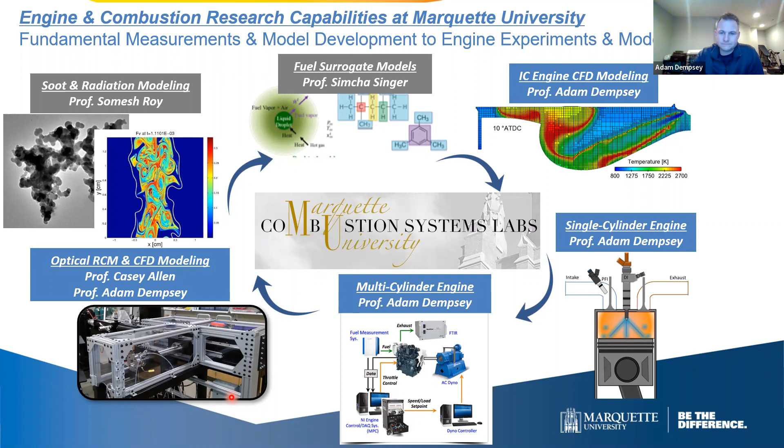So diving into the topic at hand, like any good engineer, we have to define the problem first. So why am I talking to you today? What problem am I trying to solve? The transportation industry in the United States consumes about 28 quadrillion BTUs of energy each year.

This includes all energy used in transportation. Fossil fuels like gasoline and diesel fuel are the dominant ones, obviously, but also some natural gas and propane. This includes all biofuels, mainly ethanol, and then also any electricity, so any electric vehicles. That's the total energy use.

But it's difficult to digest what a quadrillion BTU is. So that 28 quadrillion BTUs is equivalent to about 224 billion gallons of gasoline. It's not to say that it's all gasoline, but that's the energy equivalent. This is about a third of the country's total energy consumption, if you include buildings, factories, homes, and everything we consume on an annual basis. Of this energy consumption today, about 90% of it comes from fossil fuels, namely gasoline and diesel.

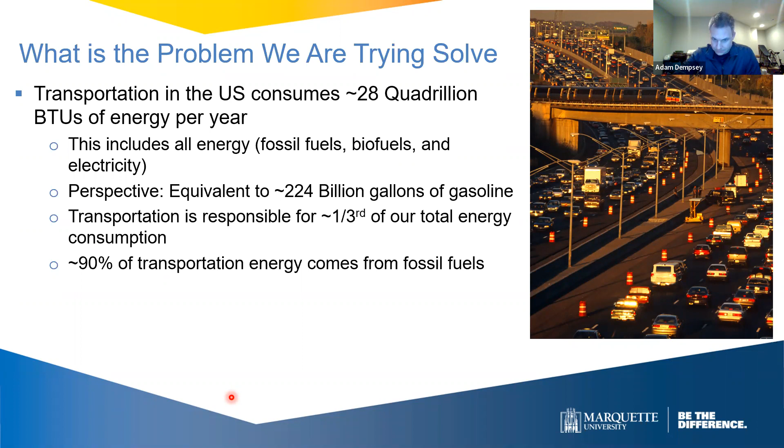So that leads to the problem statement. The problem is that passenger and commercial vehicles consume a very large amount of a primarily non-renewable resource, fossil fuels, and they emit toxic and greenhouse gas emissions. This is not sustainable because the resource is not renewable, and it's also a problem because the emissions negatively impact our environment. So that's the problem we're trying to solve.

The negative impacts on the environment are twofold. There's the toxic criteria pollutants that tend to affect local air quality, things like nitrogen oxides, sometimes referred to as NOx, and unburned hydrocarbons or unburned fuel. These are a problem because in areas where they become concentrated, like urban settings with a lot of vehicles polluting with these emissions, in the presence of sunlight, they form photochemical smog. This picture is of Los Angeles, and in the basin they have a lot of challenges with photochemical smog, particularly back in the 70s and 80s when vehicles weren't as regulated. Engines also produce carbon monoxide, soot, and particulate matter, which are also very damaging to human health.

Other emissions that we care about, more recently, weren't really on our radar say 30 or 40 years ago, are greenhouse gas emissions and how they affect global climate change. When we burn fuels, we release CO2. If you're working with natural gas, you might release some methane. And while it's not really a challenge for combustion engines, some industry applications will emit nitrous oxide.

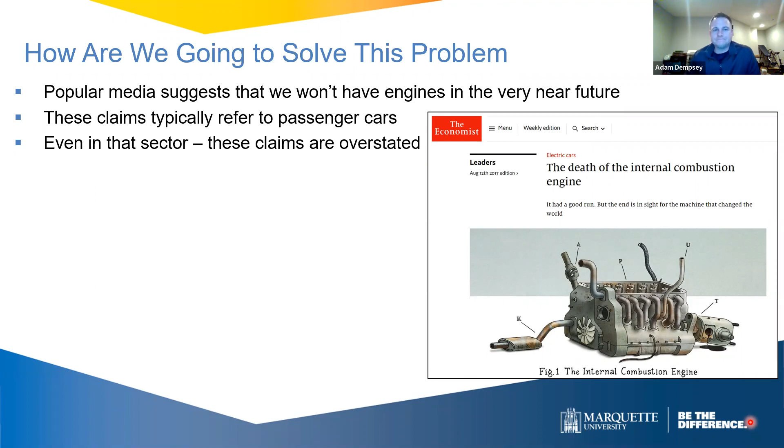So I do believe that battery electric vehicles will be a very important technology for the future of sustainable, clean transportation. I think they're a great thing. I think we need to be a little more honest about what sectors of transportation are well suited for battery electric vehicles. So I want to be very clear, I am not anti-electrification, I'm pro-arithmetic. I don't bash technologies, we just do the math and then we decide if it's a good technology.

So let's do a little bit of analysis in this presentation to walk through what sectors might be good for electrification and what sectors might we still need engines.

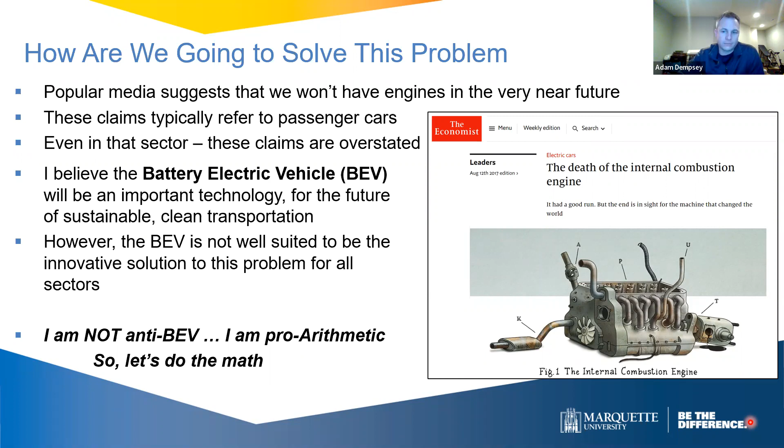So why would anybody consider to keep developing the internal combustion engine? Well, we're talking about transportation. So from a systems engineering viewpoint, this is a mobile application and we have to carry our energy source on board the vehicle. So energy density is of the highest priority.

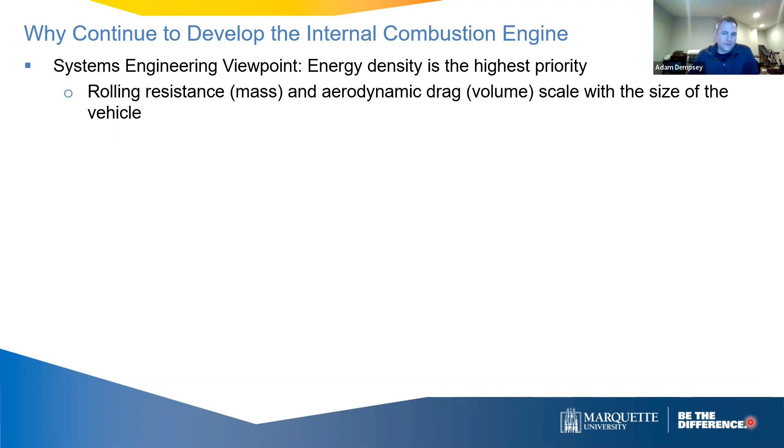And the rolling resistance of a vehicle scales with its mass because of friction, and the aerodynamic drag of the vehicle scales with its volume because of the frontal area. So if I'm carrying around an energy source that propels my vehicle, I want to be energy dense on both of these fronts - on a mass basis and a volume basis.

So here are a bunch of energy carriers, and it's a scatter plot of the mass-based energy density versus the volume-based energy density. So I want to be in the upper right-hand corner, which is energy dense on both fronts, and that's where we find fossil fuels.

So that's gasoline and diesel, which are very dense in terms of how much energy they carry per unit volume and per unit mass. A lot of times people talk about hydrogen fuel cells as a propulsion mechanism for vehicles, and hydrogen has a lot of challenges from a production standpoint, but it also has a lot of challenges from a storage standpoint. So hydrogen gas at standard pressure and temperature has essentially no volume-based energy density.

And if you compress it to 700 bar, which is very high pressure and requires a lot of energy, you can start to get some volume-based energy density, but it's not very good. And if you liquefy it, which is very hard to do, obviously cryogenically, and then store it as a liquid, which is very challenging, you still have very low volume-based energy density.

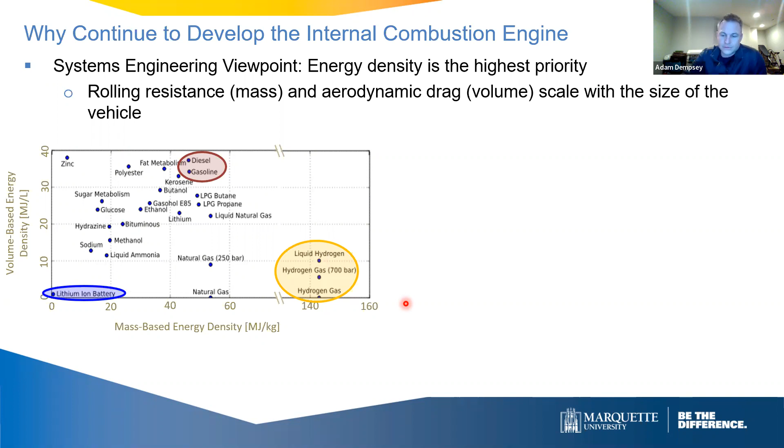So just to give you some context here, if you take the extremes like an Airbus A320, it carries 266 megawatt hours of fuel energy when it's fully loaded with fuel. If you used a state-of-the-art lithium-ion battery to replace that fuel tank and have a 266 megawatt hour battery, the battery itself would be 19 times the max takeoff weight of the airplane, and it would take 11 days to charge the battery. So a full battery electric airplane is kind of a non-starter with current technology.

Bringing it back down to earth in an application that I'm very interested in, if you just look at heavy duty trucks - a class 8 semi truck that has a gross vehicle weight of 80,000 pounds - if you wanted to have a 500-mile range battery electric version of that truck, you would need a 1,000 kilowatt hour battery pack. That battery pack would weigh about 15,000 pounds, and that's lost payload for the operator of the truck. So that's a bad thing.

The battery itself would cost about $180,000, which at current battery prices, which are coming down admittedly, is really expensive - that's about the same price that the diesel truck costs today. And that's just for the battery. Even with a state-of-the-art charger, you would have to charge this thing overnight for about 12 hours.

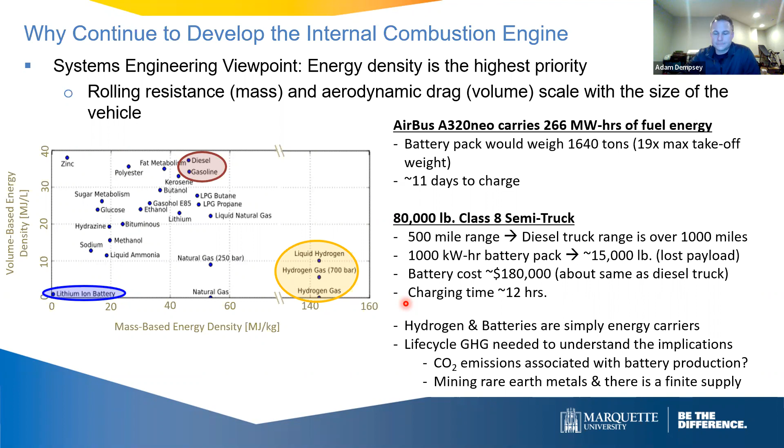I think I've made it pretty clear that liquid hydrocarbon fuels have unrivaled energy density, which is repeated in this plot here - the energy density of hydrocarbon fuels versus a lithium-ion battery. But conversion also matters. If you look at the power density in kilowatts per kilogram of an internal combustion engine versus an electric motor, the electric motor is more power dense. So you have to take a deeper look, and for different applications with different power requirements and time of operation requirements, that will likely determine the optimal system. It's not really a slam dunk that the battery electric vehicle could be used to replace all internal combustion engines.

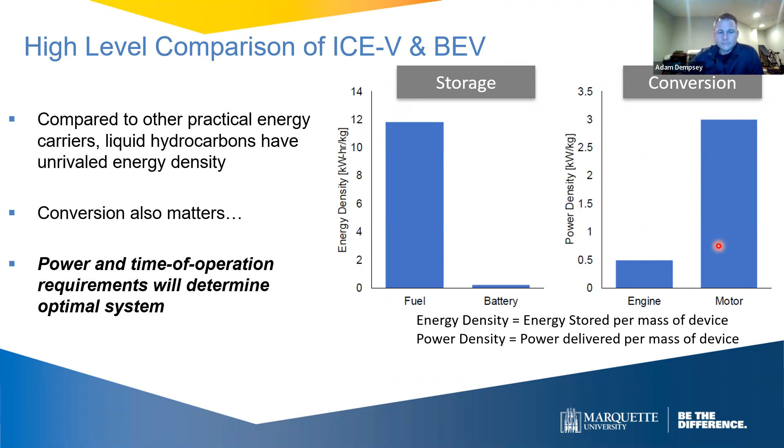So why don't we combine this picture and look at a couple of different applications?

Before we do that, I want to remind you that there's another important aspect here, and that's recharging time or filling time. In some applications filling time is maybe not important, but in others it's really important. For liquid fuels, filling up your car doesn't take very long, and the reason is that the energy flow in a fuel nozzle is just astronomical. Most commercial gasoline nozzles for passenger cars run at about 5 gallons per minute, meaning there's 10 megawatts of power flowing through your hand. If you're filling up a heavy duty diesel truck at a truck stop, they tend to have higher fuel rates at about 30 gallons per minute, which is about 60 megawatts.

Compare that to charging an electric vehicle. With a level 1 charger, the power coming out of your wall in a residential home with 20 amp service, you're only flowing about 2 kilowatts. You can upgrade to a 240 volt 80 amp service, known as a level 2 charger - these are available today when you purchase an electric vehicle, but that's still only 19 kilowatts. Even a Tesla supercharger, a level 3 charger at 480 volts and 300 amps, is only 144 kilowatts.

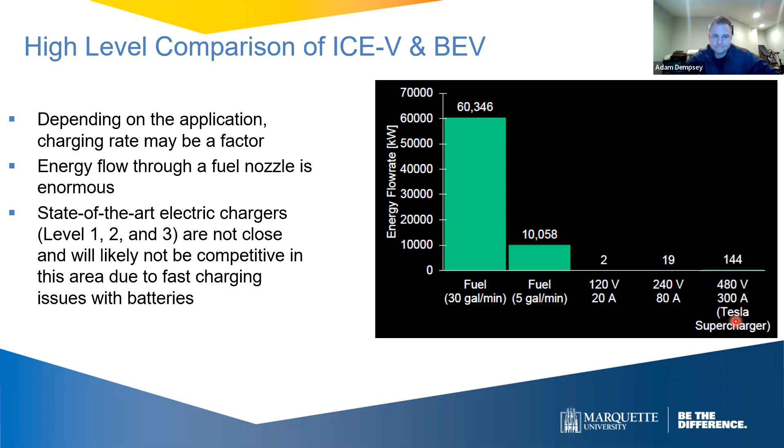So why don't we do some very simple analysis where we evaluate for different applications the trade-off between charging time, weight, and all these different factors, and see if an internal combustion engine or a battery electric vehicle is probably a better solution. This analysis was done by a colleague of mine at the University of Wisconsin, Sage Kokjohn. We've co-authored a few papers together comparing alternative fuel IC engines to battery electric vehicles, and he was kind enough to share these couple of slides with me. I think it's very enlightening.

So if we look at Sage's analysis, this is a plot that we're going to look at. I want to explain it before we look at it: it's power of the propulsion system versus operating time. And what's being plotted on the contours is the mass of the electric vehicle minus the mass of the internal combustion engine system.

So if you want to operate for longer periods of time at higher power levels of the BEV, you're going to need a bigger battery, and it's going to weigh more compared to the engine. So that's why this contour plot looks like this.

We're going to look at various applications, and here are some of the assumptions for the battery electric vehicle and the internal combustion engine. We're going to size the application for peak power, because you're going to have to hit certain power levels, even though on average you're going to have much less power. The internal combustion engine will assume an efficiency of 35%, which is pretty reasonable. The BEV will have a charging efficiency of 85%, also pretty reasonable. And we'll take a state-of-the-art energy density for a battery, which is about 250 watt-hours per kilogram.

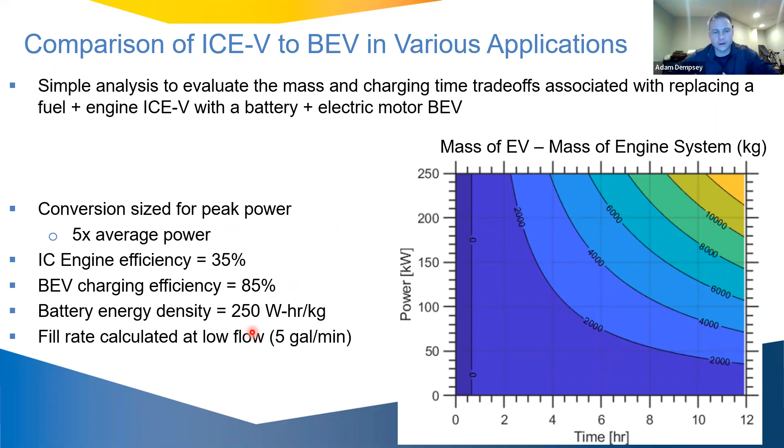So the first application I want to look at is what I would call just a light-duty passenger car. This wouldn't be like the sports car Tesla. This would be a battery electric vehicle bought for commuting. It's not really a high power application. It has a peak power of only 100 kilowatts and an average power of about 20 kilowatts, with a 3-hour operating time.

So this would have a range of maybe a couple hundred miles, but certainly not a range of 400 or 500 miles like some of the really expensive, high power output Teslas and other vehicles being advertised. So if we said we needed a battery that would give us 3 hours of operation and 100 kilowatts of peak power, then the battery and the motor together would weigh this much, and the fuel and the engine would weigh this much, a difference of several hundred kilograms.

The other factor here is, how can I refill my vehicle? If it's the IC engine version, you can fill it in almost no time. If it's the battery electric vehicle, it's going to be really challenging to charge this overnight with your standard outlet in your garage today. But you could easily upgrade to a level 2 charger, and you'll be able to charge this vehicle overnight, no problem. You could drive this vehicle to work every single day on a full charge.

And even if you wanted to drive from Milwaukee to Platteville and drive around for the day, and you couldn't quite make it back, if you could find a Tesla supercharger somewhere in the area, you could charge while you're having a meal. It would only take a half hour and you could drive home.

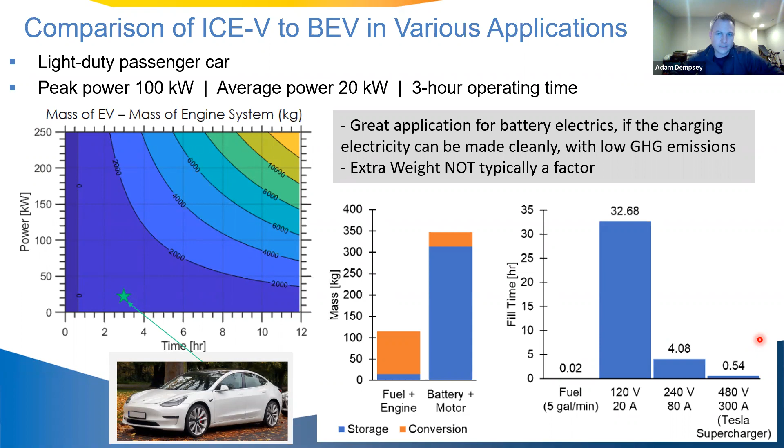The challenge comes in as we start to get to bigger and bigger vehicles. So if we look at a medium duty application, this is more of a commercial vehicle application - this could be a pickup truck towing a trailer, or a large cargo van full of tools, but it's a vehicle that the operator is using for his way of life, and he's got some payload. So it's a bigger vehicle, it has higher power.

We need to size the battery to run all day long, because if you're towing trailers back and forth to the work site, or maybe it's a small dump truck hauling aggregate, it might run all day long. So we're going to size the battery for 8 hours, and it's going to be a big enough battery to deliver these types of power levels.

And that means compared to a gasoline or a diesel engine, it's going to weigh about 2,000 kilograms more, which is roughly 5,000 pounds or something. So it's a significant amount of weight that we're going to have to carry around, and that might negatively affect your cargo or your payload.

The other challenge with this is charging, right? So if you charge this medium duty vehicle at your garage or your shop or your place of business overnight, even a level 2 charger is not going to charge it overnight. So if you need this vehicle every day and you used it for 8 hours one day, you won't be able to use it the next day with a level 2 charger.

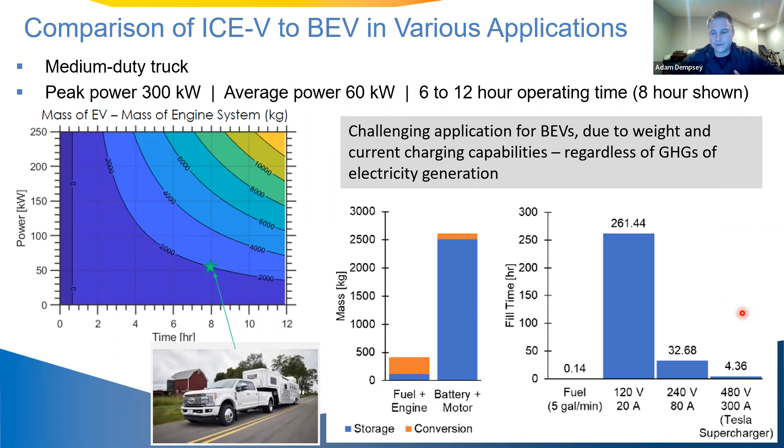So you're giving up a lot of payload, which is not good for commercial transportation. That's what you're hauling is payload.

So in my personal opinion, this is a very challenging and not likely application for battery electrics. And if we want to solve our problem, we're going to have to go a different way.

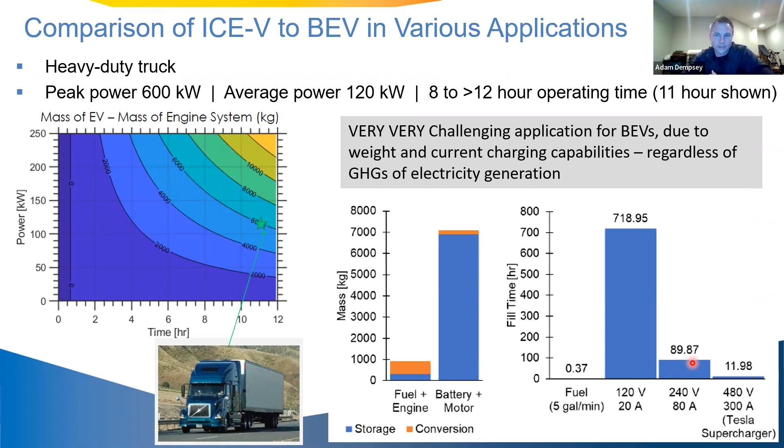So if you look at some projections, you can see some of these themes. This is projections out to 2040 for transportation energy demand. So you see gasoline, diesel fuel, jet fuel for aviation, natural gas, and electricity. Electricity is starting to grow because BEVs are certainly going to penetrate the light duty market. And that's why gasoline demand is going down around the world.

Diesel fuel demand, however, is projected to grow by about 40% in the next 20 years. This is due to the developing world and the growing global economy and e-commerce and things like this. The economy is driven by heavy duty trucks, large ocean going vessels, rail, all those things. So as the economy grows, diesel fuel demand grows.

It's very difficult, as I just said, to fully electrify these sectors. So these sectors are growing due to the growing world and the growing economy, and they're sectors that we can't really electrify. So the problem is getting worse and worse because we're burning more and more diesel fuel in the coming decades.

So there's an imminent need to decarbonize heavy-duty diesel engines, and we need to do it with renewable, low life cycle greenhouse gas fuels, because battery electrics are not a good technology for this sector.

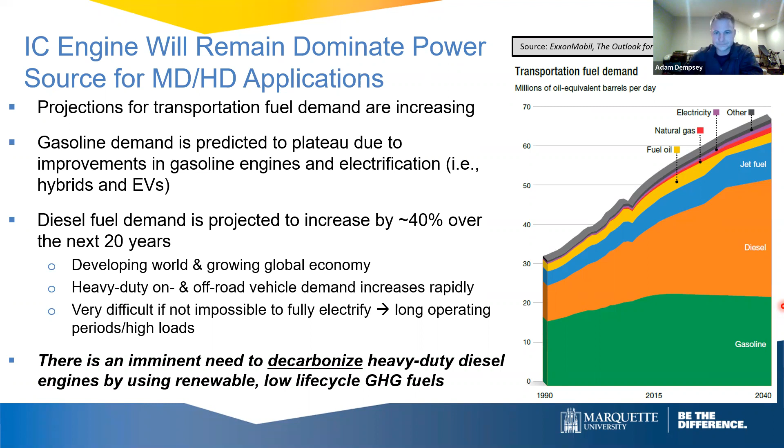So when I say low carbon alternative fuels, what am I talking about? Well, there's a handful of candidates. There's more than what I'm going to list here, but these are the ones that I'm interested in. So the alcohols, say methanol and ethanol, maybe even butanol and propanol, they can be made from a variety of biomass feedstocks, among other things, and they will have roughly 30 to 60% lower life cycle carbon because they were made from a feedstock that absorbed CO2 when it was growing, hence the term biofuel.

Natural gas and propane are fossil fuels, but they have lower indigenous carbon compared to gasoline and diesel. So using them as fuels in the near term is a good way to curb our CO2 emissions because they will emit less CO2 per unit energy.

And then hydrogen and ammonia are interesting fuels because they're carbon free. They have some challenges with energy density, like I talked about before. But if you can make them from renewable energy, then they're truly carbon free. These are very interesting energy carriers for engines as well.

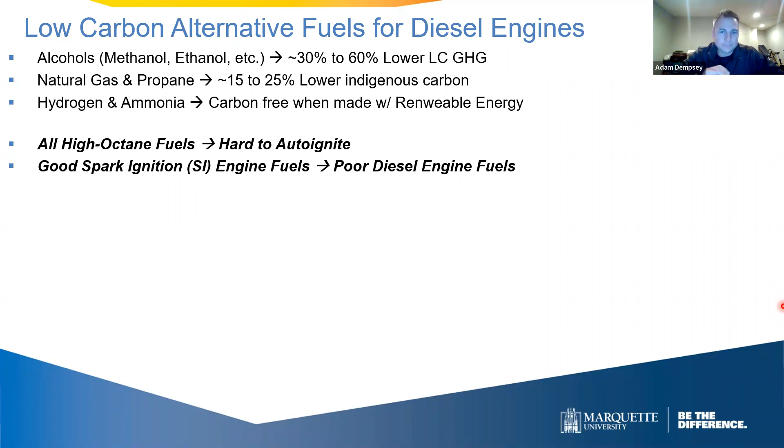The problem is all of these fuels are very difficult to auto-ignite. So they make very good spark ignition engine fuels, but they make poor diesel fuels. And I'm proposing that we replace diesel fuel with these fuels.

So I think the obvious answer is, why don't we just use spark ignition engines in the heavy duty sector? Why don't we just use an SI engine in a semi truck? Well, there's a reason you don't see that today.

It's because SI engines can't meet the performance demands of a heavy duty application. If you look at the torque curve of an engine, SI engines have challenges with premature auto ignition at high torque levels. At high power levels, they have to do fuel enrichment to protect the components from high temperatures, and they also have really poor efficiency at part load. So the SI engine is really just not well suited for the heavy duty sector. They just can't deliver the performance in terms of efficiency and peak torque output that a diesel engine can.

So the challenge is, I want to burn fuels in a diesel engine, but they're really poor diesel fuels.

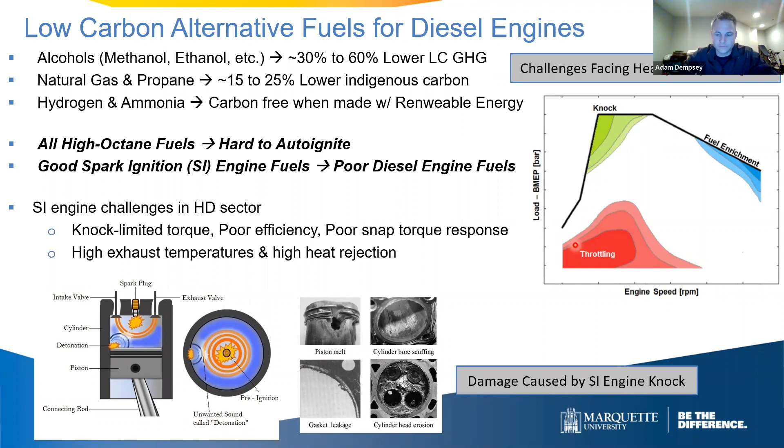Before we press on, I think it's really important that we know what the diesel combustion process looks like, so you know what we're trying to reproduce. This is a CFD simulation of a diesel engine showing what the diesel combustion process looks like. You can see in the animation it's a double injection strategy where we have these two injections shown in blue, and then the chemical energy release, or the burn rate of the diesel fuel, is shown here in red.

Because diesel fuel ignites pretty quickly, we can establish what's known as a non-premixed, mixing controlled combustion process, where the fuel and air can only react and release energy when they find each other. So the burn rate is limited by mixing, hence the term mixing controlled combustion. This combustion process allows us to run really high torque output because we don't have any premixed fuel, so we don't fear premature auto ignition. It also has a lot of other characteristics that are desirable for heavy duty engines.

So this is the combustion process that we want to reproduce, but with alternative fuels that really don't want to auto ignite.

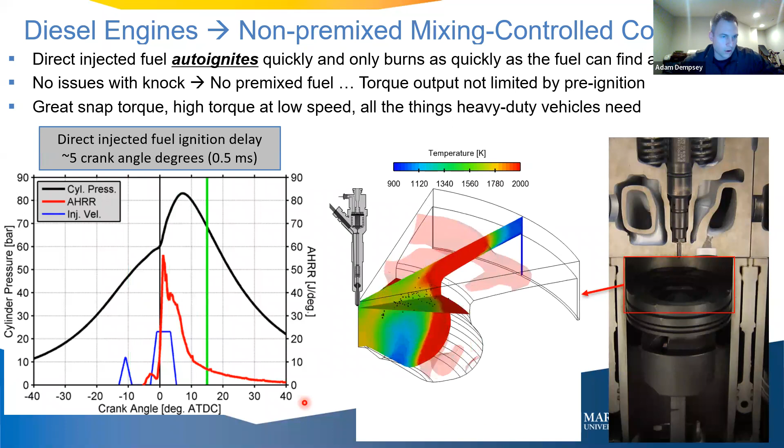So let's quantify how big this problem is. How hard are these fuels to auto ignite? This is a plot of ignition delay versus temperature - so it's the inverse of temperature. Low temperatures are shown over here, and higher temperatures over here. The ignition delay is on a log scale, so it's important that we're traversing very different amounts of time here. Then we have a bunch of fuels shown on this plot.

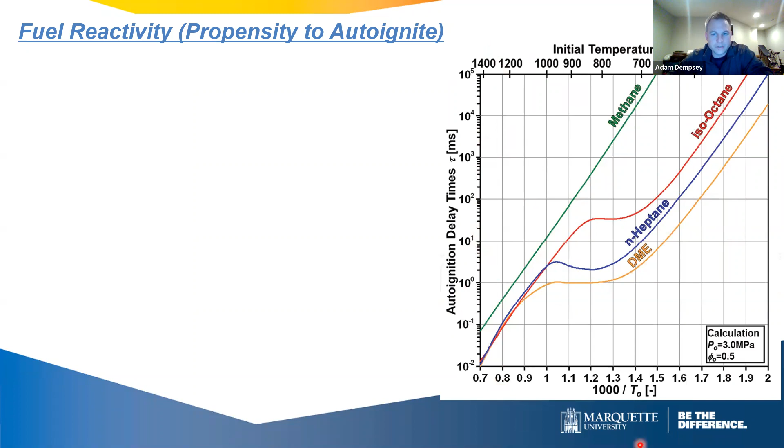So if we look, diesel fuels are low octane, meaning they have a short ignition delay - they auto ignite very readily. These are things like diesel fuel, which isn't shown on the figure, but N-heptane and dimethyl ether have the reactivity, if you will, like diesel fuel. In the temperature range of interest for engines, between about 700 and 1200 Kelvin, we see ignition delays that are relatively short, on the order of a millisecond or less, and that's what allows you to establish that mixing controlled combustion process pretty quickly.

Things that are poor diesel fuels - here I'm using methane as an example, but the alcohols, propane, hydrogen - they all have relatively long ignition delays, kind of like methane. In this temperature range of interest, we're up in the 10 to 100 to 1000 millisecond auto ignition delay time for methane. So those are very high octane, very hard to ignite fuels.

Well, you might be thinking, 10 milliseconds isn't a very long time, so why do we care if the ignition delay is 10 milliseconds longer for methane than N-heptane or something? Well, in an engine, 10 milliseconds is forever - it's an eternity. The piston goes from top dead center to bottom dead center in 180 crank angles, so 10 milliseconds is 120 crank angles - almost the entire expansion stroke.

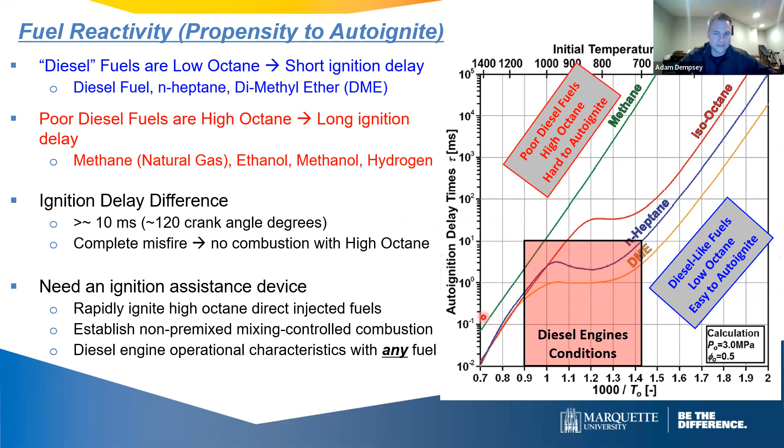So let me illustrate that a little more clearly with the simplest way I can think to do ignition assistance. You can see that ignition delay time is very sensitive to temperature. So all we got to do is get it hotter. If we can get the methane hot enough, it will have an ignition delay very similar to a diesel fuel.

Where you're going to get this heat from is unknown. You could run a heater or something like this, but this is obviously going to hurt the engine efficiency. It's also very difficult to control intake temperature very rapidly. So intake temperature control is kind of a difficult thing, but this illustrates that if we could heat the engine enough, we could run it on something like ethanol.

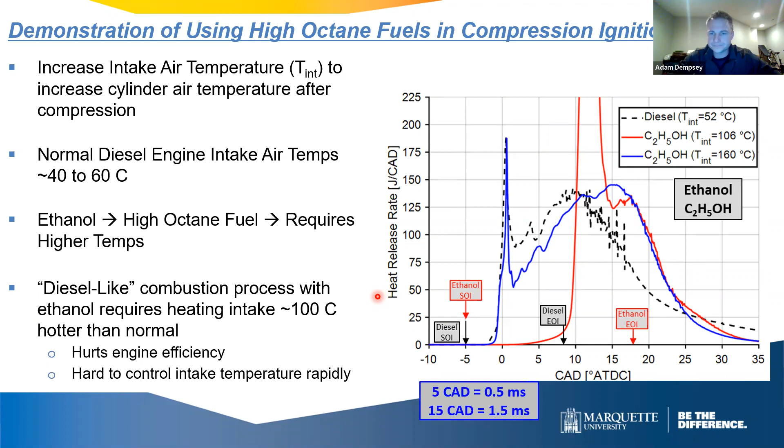What we're working on is something we think is obviously a little more innovative, but is something we can control on a cycle-by-cycle basis. So what we're trying to do is develop an actively fueled pre-chamber, which will serve as an ignition device.

A diesel engine would typically just have this center direct injector delivering these blue plumes, which would be the diesel fuel. But then we have this pre-chamber igniter where we can have a separate fuel injector filling that pre-chamber. We can fire a spark plug, and then hot jet flames will emanate from the pre-chamber. And when we direct inject a fuel that doesn't want to ignite, if it comes in contact with an already burning flame, it will auto ignite. So the pre-chamber jets serve as our ignition source.

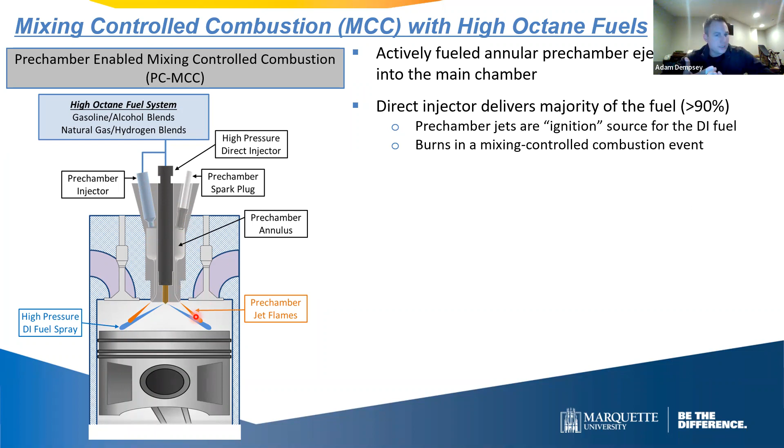We've been able to show with simulations that this will allow us to run all sorts of different high octane fuels that don't want to auto ignite, such as gasoline, ethanol, natural gas, hydrogen. You could even run blends of those fuels, because if you have an ignition assistance device that is robust like a flame, octane number doesn't really matter anymore.

Anything that comes in contact with the pre-chamber jet is going to ignite. So you could even think about having a heavy duty vehicle that's sort of a flex fuel vehicle that could run on gasoline ethanol blends. It could run on natural gas, propane, hydrogen blends, or anything that you can think of.

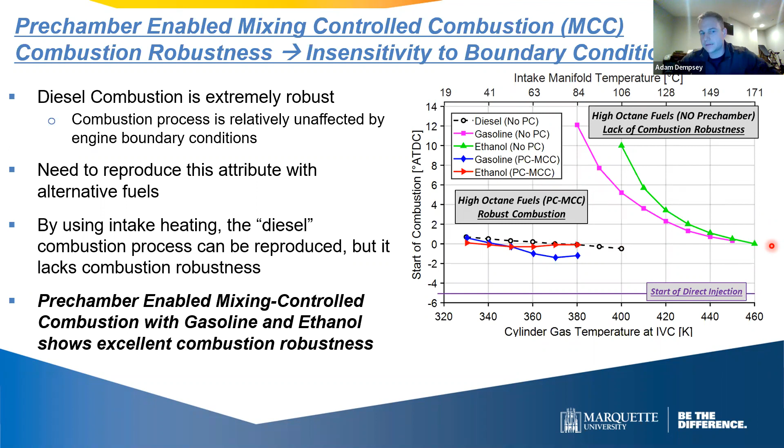If you look at the start of combustion versus changing the intake temperature, it's very flat. We don't want the engine to be sensitive to intake conditions. It's desirable for it not to be sensitive, meaning if it's cold or hot outside, the engine runs the same. Where if you don't have a pre-chamber and you're relying on intake temperature to be your ignition assistance device, even if you can get really high intake temperatures, which is hard to do, you'll still be quite sensitive to whatever that temperature is. So the engine might be unstable if you're counting on intake temperature to be your ignition assistance device, which is not desirable.

I think the last piece of the puzzle I want to discuss here is the main mission, which was to solve the problem of using large amounts of non-renewable fuel and the impact on global climate change. So we want to reduce our CO2 emissions. If we can reproduce the diesel combustion process with diesel engine efficiency, the whole story then is just: give me a fuel that has the lowest life cycle CO2, meaning low CO2 in its production, and we can reduce CO2 emissions dramatically.

Here you can see if we could take a diesel engine and run it on blends of ethanol all the way up to pure ethanol, we could cut greenhouse gas emissions by about 50%. This would be from ethanol made from corn in this country, or ethanol made from sugarcane in Brazil, all these different sources. They all have slightly different life cycle CO2, obviously, but because of improved farming practices and distillers grain and things like this, every year these numbers are getting better and better.

As a point of discussion, even though the battery electric vehicle semi, I think, is sort of impractical from a weight and charging perspective, it's also not that great from a CO2 perspective. Meaning if you're charging from the US electricity grid, which has brake-specific CO2 emissions of only 418 grams per kilowatt hour, the power plants are a lot better than a diesel engine from a CO2 perspective. If you include the transmission losses, the charging and discharging efficiency of the battery, and the electric motor efficiency, the battery electric semi would have CO2 emissions of 640 grams per kilowatt hour. So it would be a little bit better than the diesel engine.

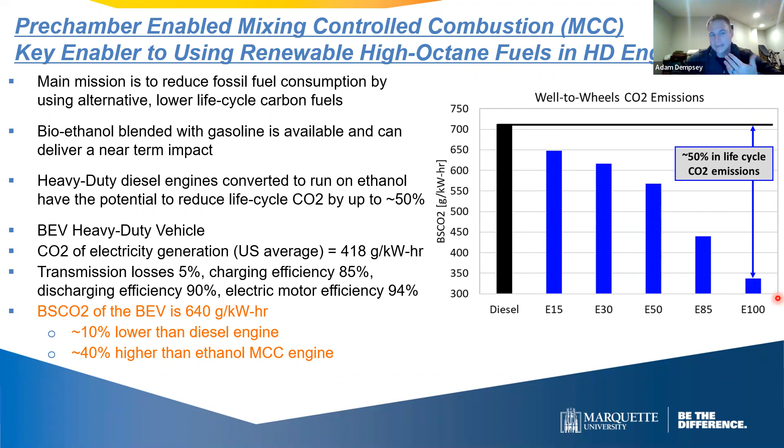It would be a little bit better than the engine running on a blend of 15% ethanol and the rest gasoline. But all these other ethanol blends, and certainly pure ethanol, are much better from a greenhouse gas perspective than a full battery electric truck. And the battery electric truck has all those practical challenges too.

I wanted to let you know that we're really excited about this concept, and we have two federally funded projects working in this area. The one on ethanol is being funded by the United States Department of Energy, their Energy Efficiency and Renewable Energy Office. Marquette is leading this program, which is supposed to start next month. We're partnering with the University of Wisconsin, John Deere, ClearFlame Engines out of Chicago, and MAHLE Powertrain out of the Detroit area, and we're all going to be working together to demonstrate this technology.

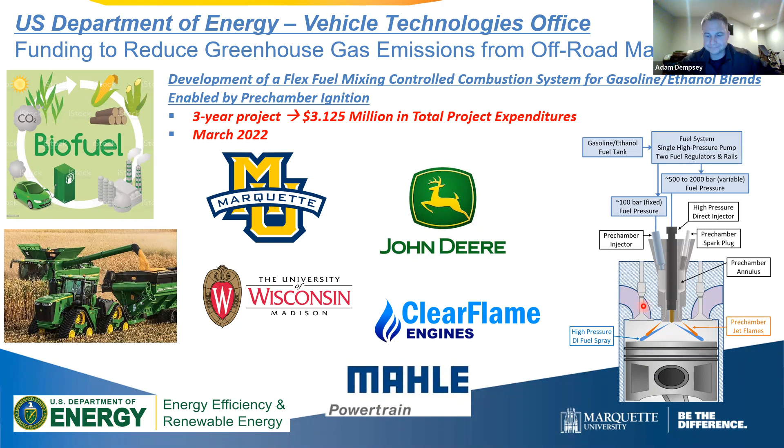We have another project funded by ARPA-E, which stands for the Advanced Research Projects Agency Energy, who I will tell you right now is the best institution at coming up with acronyms. If you ever need a good acronym, pay them to do it, it'll be worth it. So they had a program called REMEDY, which stands for Reducing Emissions of Methane Every Day of the Year, because methane is a very powerful greenhouse gas.

There's a lot of engines in the natural gas pipeline industry that run on natural gas, and they emit a lot of methane. It's because they're premix charge SI engines that have a lot of incomplete combustion. If we could convert those engines to this concept, we've been able to demonstrate that you'll have very little methane emissions. So we think we can convert natural gas engines to operate with this concept, and we will reduce methane emissions by a large amount.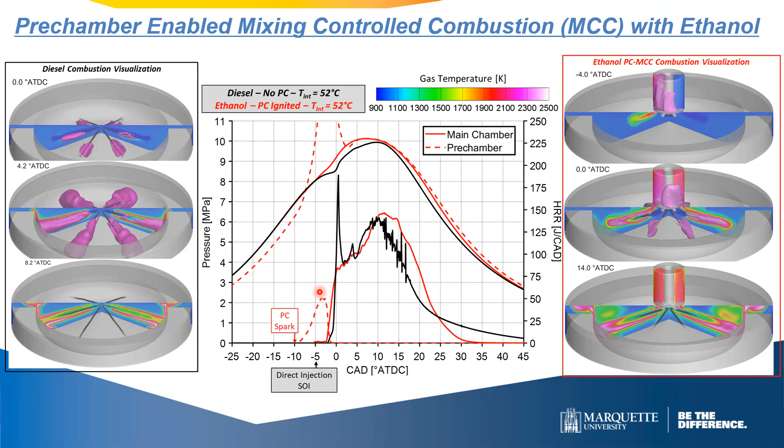Yeah, it does. So in that case, your SOC will be the spark ignition, right? Will you mainly say that would be a SOC then? You mean start of combustion? Yeah, I don't know.

That's a good question. Certainly in the experiments, we're going to have a pressure transducer in the pre-chamber, and a pressure transducer in the main chamber. So this is CFD modeling, but in our experiments, we'll be able to compute heat release rate in the pre-chamber and heat release rate in the main chamber. So I could tell you SOC, CA50, all that stuff in each chamber.

I realize what you're saying is that those metrics are really tied to efficiency, but we'll be able to put them wherever we want because we have control over this spark plug and the direct injector. So if I move everything to the left, everything shifts to the left, and if we move those actuators to the right, everything shifts to the right. So we have control over the start of combustion, which is the really important thing.

Okay, got it. Oh, awesome. Yeah, all right, thank you. Yeah, no problem. Good question.

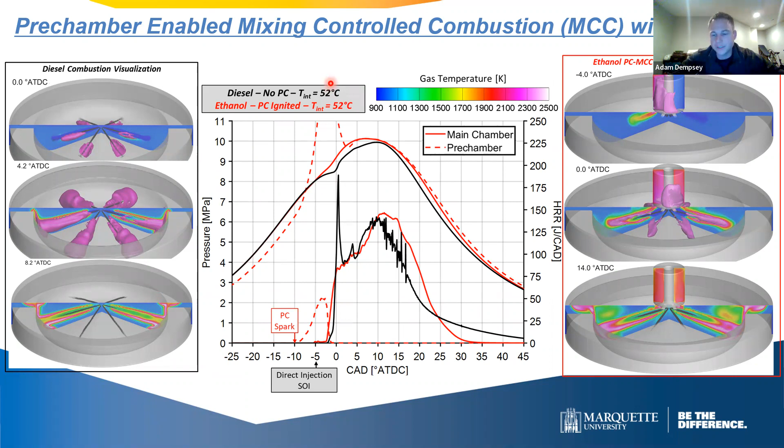And then we need to do a design exercise to find room for this in the engine. That's where John Deere and MAHLE are going to help us out. They have a lot of design experience for 4-stroke, 4-valve diesel engines, and they're going to help us find room for the pre-chamber. So hopefully that answers the question — basically designing the thing and then finding a way to implement it is kind of the first step.